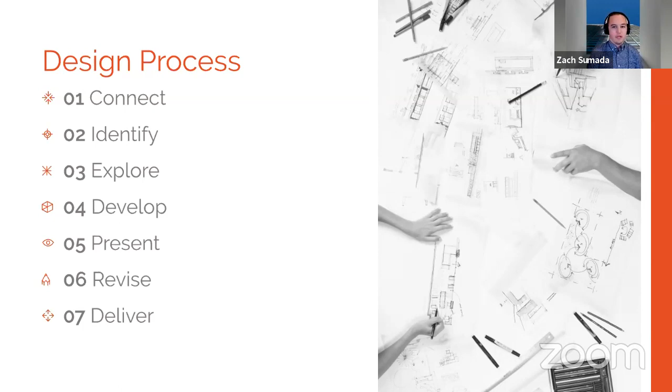And so we developed this process mainly to keep us on track and to help to communicate to the client, especially how they're going to be guided through this process. Because oftentimes the clients that you're meeting with have never met with an architect before, they've never built a building before, and the lingo and the process is kind of new to them. And so we're going to run through this today.

And our design process really starts with that connect phase. It's the first business development meeting. It's that first meeting with the client to discuss what their goals are for the project, what their business goals are, what their budget is, what it is that they're looking for. And oftentimes you're going to help them figure out exactly what that program is. It's very rare that a client will come to you with a sheet of paper that says, I need, for this example, we'll be using an office building, X number of conference rooms, X number of offices, and this many workstations.

We as architects oftentimes are helping them create that, understanding the requirements associated with exiting and understanding the exact layout. All those different things are what you're going to have to extract from them in order to build a successful project. In that first phase also, that's a really good time that you lay out some of that jurisdictional stuff. That's where you get those kind of prerequisites before you even put pen to paper. You get that all on the table so that everybody starts at the same point and understands the same challenges.

Yeah, because oftentimes when it comes to these jurisdictions, you don't want to propose a building that's 60 feet tall when the city requirements for that area or that piece of land won't allow that. And so that early phase of identifying and outlining the goals, outlining the program, setting up weekly schedules, scope of work, all that stuff happens very, very early on. And then from that point, you really start to dive into exactly what this building or buildings could be.

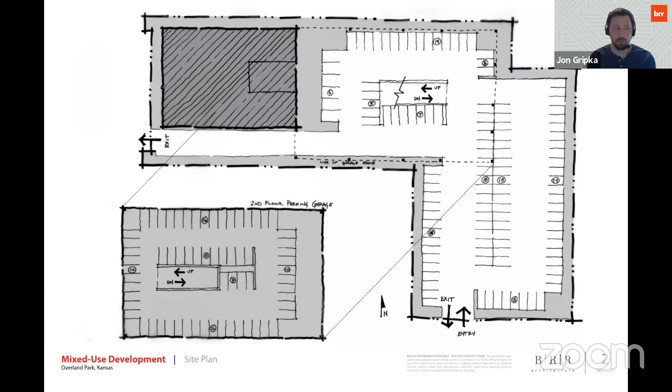It shows a basic idea of the floor plan. So it doesn't have to be just a very loose concept sketch at this point. You can start figuring some stuff out and doing so with pen and ink. And I really, really would encourage everybody, before they design anything, to just draw some stuff. Just get pen and paper, get loose with it, and really let your creative muscles expand there. It's definitely a worthwhile exercise before you get into any design, just to do pen and ink.

Yeah, I should have prefaced that at the beginning: you're going to see examples on your screen of a sketch, but this isn't just, hey, we came up with this and that was it. This was an iterative process similar to what you are all doing in studio right now, and you are constantly testing out different ideas because you never know what that next idea can lead to. But the whole concept is to be able to do this very quickly and very efficiently. Turning around site plan concepts like this would take an hour, not days. So you want to be iterative, and you want to make sure that you're thinking through as many scenarios as possible, but you also want to be mindful of everyone's time.

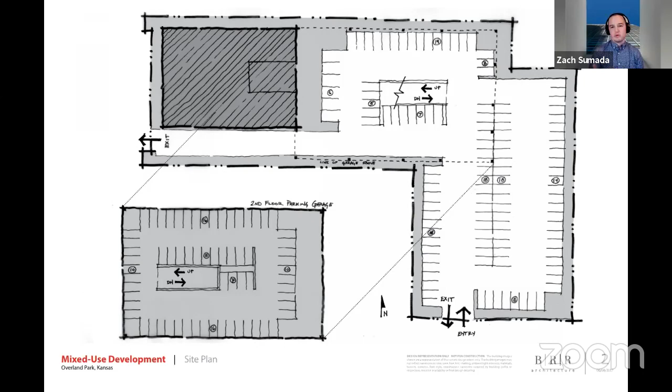And from there, it really begins. You get into the fun part of, okay, now we have the site, we have a building, we know approximately what the square footage or floor plan is going to look like, but how do we even begin to communicate to the client what this thing's going to look like? And that initial phase isn't just starting out and saying, this is a blank slate, this is what you're going to have. Oftentimes we meet with clients and we say, what is your idea? And they can give you words: I want a modern, or I want an industrial look. I want contemporary, I want traditional. But all those words mean different things to different people.

And so the process that we utilize at BRR is going through this process of precedent imagery. We put a bunch of projects in front of the client that are built, renderings, details, lighting, texture, they include everything, really to just get an idea for what it is that they're trying to achieve. The building in the upper right-hand corner of your screen, very modern. The middle one on the bottom, very traditional. I would say that three of these buildings are very modern buildings, but they all have very, very different design aesthetics.

So extracting that level of detail from the client early on, it's like, well, I really don't like metal panel. I'd like dark wood. I prefer this rich look to it. I've got to have brick on the building. All those different things help you when you start getting into the design phase, being able to jump back to this initial identify and connect meeting and say, hey, this is what our goal was. This is what we were trying to achieve. And let's make sure that we continue to implement those things.

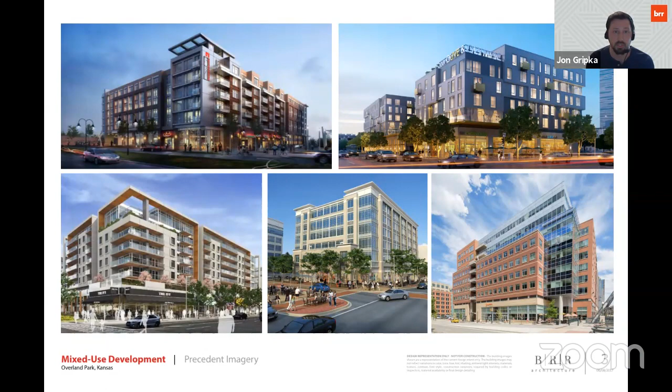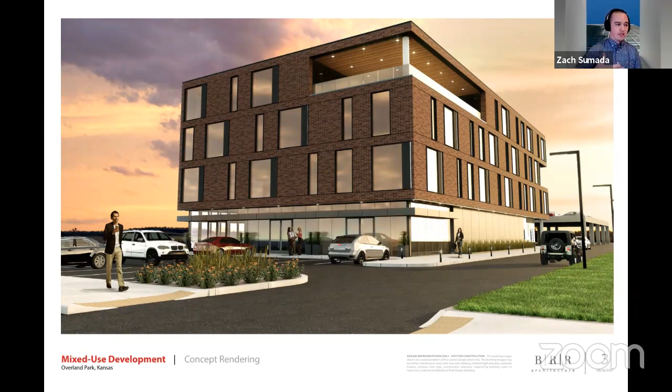And when we started this process, we did the exact same thing with our ownership group, as well as the developer that was helping to build the project. This initial concept you see on the screen was very, very different than what we ended up with. But this served as a jumping off point, because the developer can now approach other potential tenants and say, hey, this is the location we're looking for. They can approach banks and say, this is approximately how much this building is going to cost.

The contractor can look at this and say, this is what we're seeing on the screen. We're seeing butt jointed glass. We're seeing brick. We're seeing a fourth floor patio, randomized windows, full pane glass. This is going to cost X number of dollars. And having those pre-con services happen in this schematic design phase is possible because of the level of detail that you put into these models.

And as you guys are all aware, these things don't take very long to create anymore. And so incorporating that kind of stuff into the schematic design phase is vital for a project's success moving forward. And so what you see on your screen was an early iteration where we oriented our office building east-west, had a drive aisle that paralleled the building.

But what we found was that it minimized street frontage, which is a requirement of the city. It minimized the retail frontage, which the city wanted, and it really kind of pinched the parking. And so from this early phase, we were like, okay, well, we need to revisit this a little bit more and to get more square footage and to better understand the relationships of the site.

And it kind of takes us back there too, because part of the initial deliverables is that the developer just needed an image of something to generate that interest and to get that cost. And so that kind of takes us back to those first initial meetings where we would outline, okay, this is what we have to do first, just to see what we can do, see what we can afford, and then we need to revisit. And that takes us into our next phase, and that's the third, which is explore.

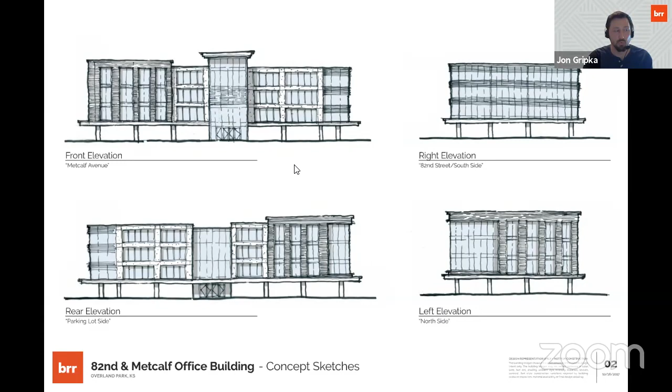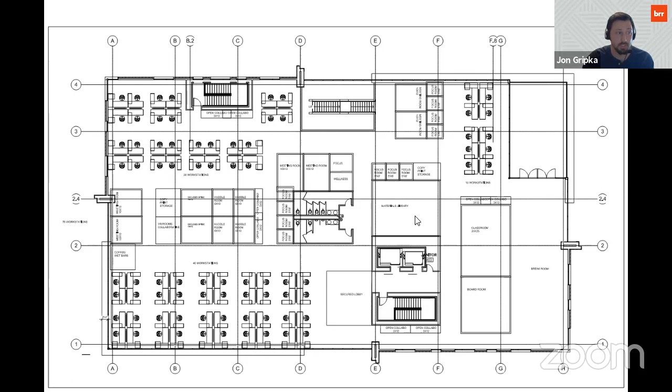Now in this situation, we were taking over 2 levels of this office building. So we did develop 2 levels in this plan, and this is pretty vastly different from what we ultimately ended up with, but it was our starting point. And so that's going to take us to our next step, and that's going to be develop.

And so what we needed to do now was to take all that information and all these different pieces from the city that we had to understand, and get that into a couple of different design options that we could then present to our developer and to our ownership, and to get their buy-off on a direction. So Zach, I'll go ahead and hand this back over to you, and you can explain our different options here.

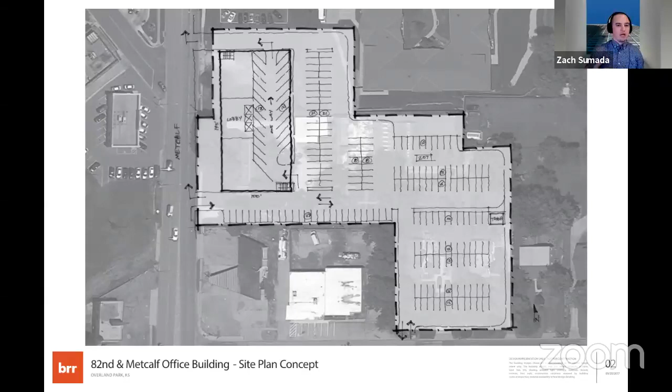Being quick with a pen and doing quick iterations is vital, because it allows you to very quickly understand what you can get away with or accomplish with a different layout. This was probably one of a multitude of options we looked at as a team to better understand what our goals were and where we wanted to end up. You'll notice the orientation of the building changed, the parking deck went away - all things that created a less expensive product that allowed us to spend money elsewhere.

In this phase, we start to extrude things up and begin to understand the massing of it - looking at the elevator cores, the stair towers, the potential for skylights, and carving and hollowing out this building to start creating a piece of architecture. This is all stuff you do in the schematic design phase.

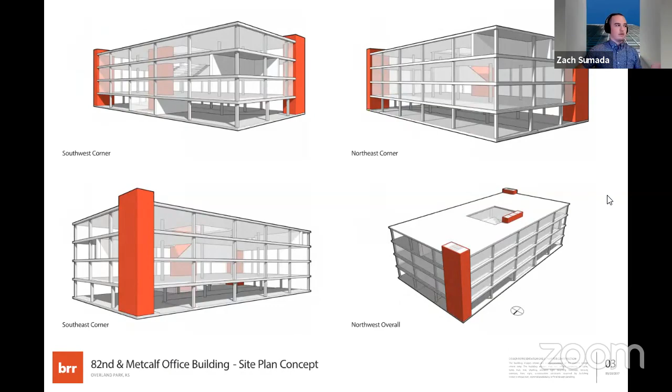Again, these are things we turn around in an hourly time block. This was one of a multitude of options for what happens if the stair towers are on the end, a central core with a skylight in it, with amphitheater style seating. What we ended up with was slightly different than this, but quick massing studies we've done here in Sketchup really help to communicate that design.

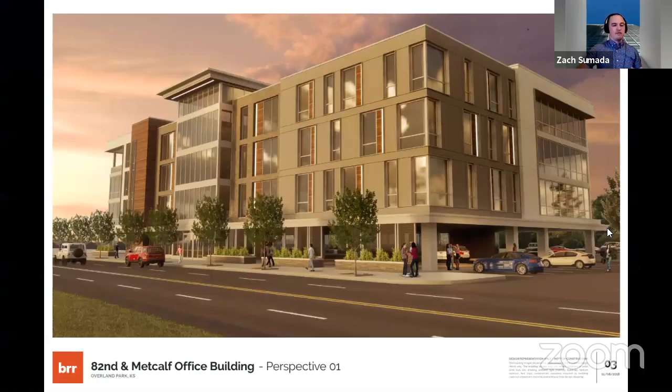Going into the present phase - the one thing I think as students we all kind of fear at the end. This happens multiple times, and you're going to have feedback from your ownership, developer, or contractor about the overall look and feel of the building, ways to save money, ways to be more efficient. This present phase for us was presenting to our ownership group two different concepts.

One concept had more of a traditional approach, which you see on screen here, which raised the entire building up on a podium to store parking underneath. Looking at the massing of it, starting to present to the city and start that communication of, okay, what do you see here, and what are some possible hangups?

Starting to apply some materials, some lighting, again giving it more context, building up that surrounding streetscape and making it a believable project - adding some scale and texture and realism. So that's the Metcalf side of the building.

Moving around to the northeast side, this is where we start to incorporate landscaping. Jurisdictions are very particular about that sort of thing - the amount of fenestration, the type of materials being used, screening parking lots from surrounding residences, screening rooftop units from surrounding residences. At this phase, because we're in a 3D model that's very accurate and geolocated, we can really start to understand what we can do.

That led us to our second iteration of this same project, looking at more of a modern approach with this bent frame structure you see off to the left, creating some efficiencies. This plan, you'll notice, is still elevated. We had a central core that had a lobby in it.

What we ended up developing was - we thought the entire ground level would be parking. Well, that didn't end up being the case, because we found through this process the ability to add some more usable square footage, which you'll see here in a bit. But again, these are quick models, all rendered out of Enscape for SketchUp.

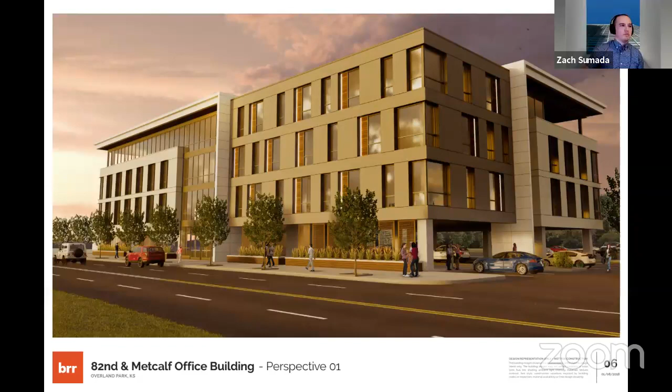Very little Photoshop work, except for maybe those birds up in the upper right hand corner. But a lot of this stuff is built into the SketchUp model, again to expedite this process, so you can spend more time doing the stuff we love doing as architects, which is the actual design process.

Something I want to point out too is just the scale we give to these renderings. This is something you as students can start to practice now - populate these things with plants and trees and cars. Zach kind of jokingly talks about the birds, but those birds provide some movement and activity to this rendering - that's a still shot. Do that sort of thing, and it's going to really enhance your renderings.

It does kind of enhance the way your renderings are going to be perceived. So that's something you just got to start doing now, and take that with you in the rest of your career. Show a building as it would be, which is a very active and lively building.

So our next phase, that's going to be revised. So ultimately, we presented the two options. Our ownership and our developer both liked the second option, the more contemporary option. So what we needed to do now was take their comments on those options and kind of move forward and work with them. So we kind of had this base form, and now we needed to see what could we do to kind of answer some of these curiosities that they had about the project.

And so one of the main issues is that we needed some more retail storefront. And so we went through and we added a little bit of glazing on the first level and kind of brought the scale of this down to the pedestrian level to give that more of a presence there. That was part of it. You'll notice that the materials have started to change. We've really started to look into that material change just to see the effect on the building.

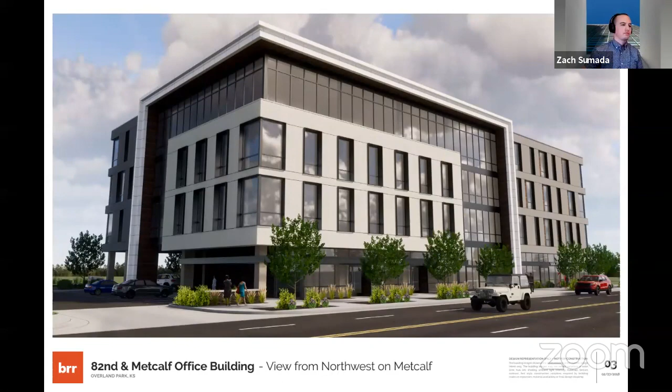But maintaining a well-built SketchUp model like this that has that level of detail in it just adds that level of realism and believability to it. Again, at this stage, which is very, very early on in the design process, before anything's even been dug out of the ground, figuring those things out now and having a rough number for what it's going to cost your client is crucial.

Yeah, so at this point, we're going to go ahead and pop over to our SketchUp model here, and Zach can show you a little bit of that work that we're doing in there, just how we can kind of quickly do these different options.

And if you want to stop sharing, go ahead. We're discovering the magic of Zoom.

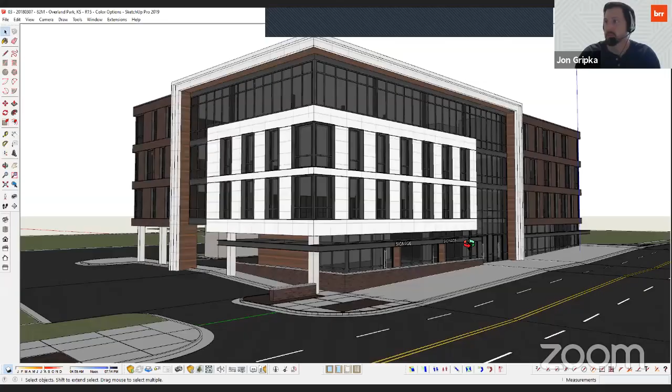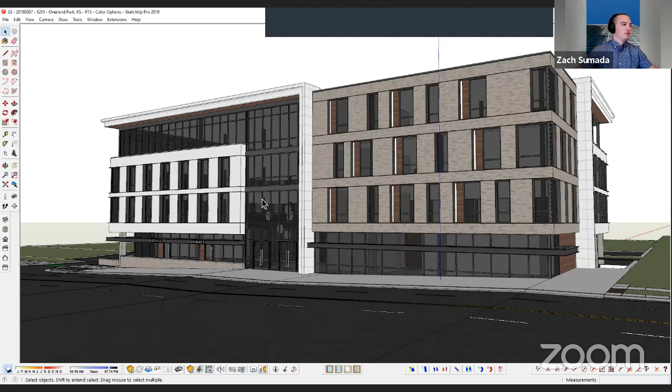There you go. So this is the SketchUp model that we are talking about, and as you can see, everything's built up pretty much all the way around the site. For this color option, we had stopped the site short just to maintain a clean model for looking at these different color options. But what you see on your screen is basically where our building ended up. But what you don't see is layered into this model were multiple iterations of the same model, looking at different color options.

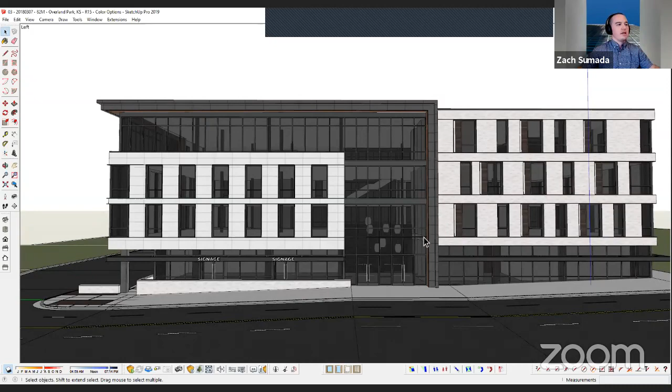We really liked the way that the forms were stacking up in this concept, but we wanted to explore the different material options for our ownership group, whether it's using a light beige brick and more of a fiber cement panel here in the middle, or do we go a completely different route: white brick, a dark bent frame metal panel that wraps the glazing, and then leaving that white metal panel box floating in the middle. And what we started to realize is that you start to lose some of that detail and that frame and what it does for the overall architecture.

And so looking at another option with, okay, well, what if that panel goes to dark and that bent frame goes light? All these different things are stuff that we explore very early on. We like the form, we like the proportions, but are we sure about all these materials and what they're trying to achieve? And what we decided on as a group throughout this phase is that, in order for this metal panel box here to really feel like it's floating in that glazing, it really needed to be a light color.

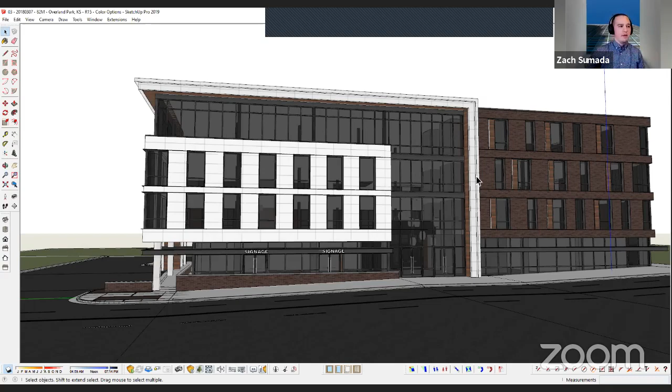And so we went back to our initial concept, which was this white metal panel box framed by the glazing, because as you guys are aware, during the daytime, the glass really does appear to be black. And so doing a dark metal panel box against this dark glazing really just tended to muddy things up. But then we really wanted that frame to pop. And so we went back to that white metal panel, introduced some wood, some linear lights to help with adding some warmth and a different texture.

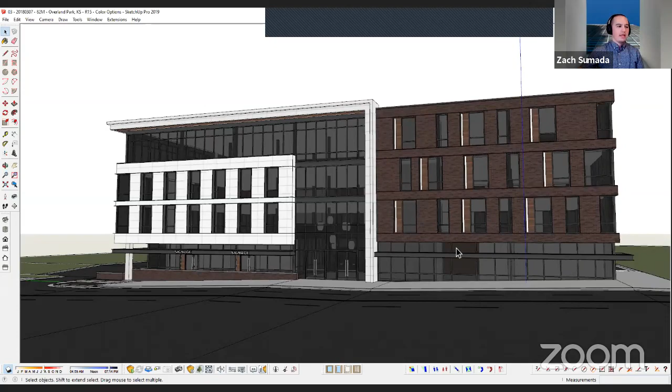And then switched, you remember in that rendering, we had this whole box as stucco. Well, the city requires a certain amount of masonry. So we looked at floating this brick box above the first floor retail space that we ended up adding. You'll notice that entire ground floor gets modeled up now to show the knee wall and how you circulate around, making sure you have ADA access all the way around the site.

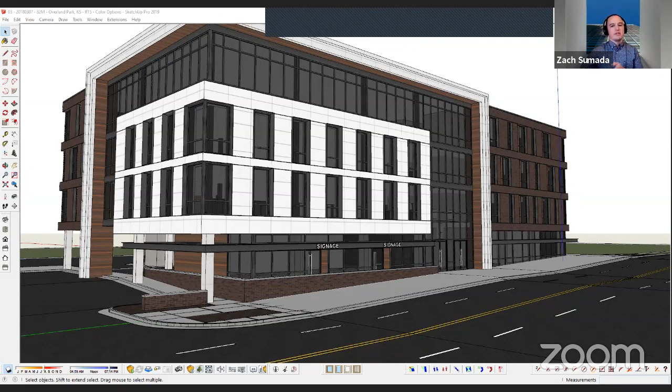And all these different things, it's iteration after iteration after iteration. I think at this point we were to revision 15 on this initial scheme. But these things are happening over days and weeks and not months. But having a model like this has been vital to helping this project become a reality. And it's something that we use for all of our projects across the board.

Yeah, it's really key, that timeline too, because we're not going in with finished renderings of 6 different projects. We are going in with a model and basically, in a matter of minutes, sitting with our client, our owners, and saying, all right, what should we do here? Should we make this brighter? Should we make this darker? And coming up with a design that everybody was happy with at the end of the day. And we were able to do that in a really, really efficient amount of time.

So this all leads us up after several different iterations, and after all the schematic work, what we ultimately have is our final phase, and that is deliver. And ultimately what you're going to have to do is come up with a deliverable that your client needs to get this project built. In this case, our deliverable was coming up with what's called a city submittal package, and that's a set of site plans, elevations, renderings that the city can then look at and give their 2 cents on and either approve or reject.

And so this isn't something that we just take in and say, here you go, this is what we designed. We were in conversations with the city for months, actually in this case years before we did this project, so that we could keep them in the loop on what we were doing. And so ultimately what we did was we developed this set of drawings, and I'm going to clip this down. There was a bit more that went into it, but I'll show you the relevant design drawings here.

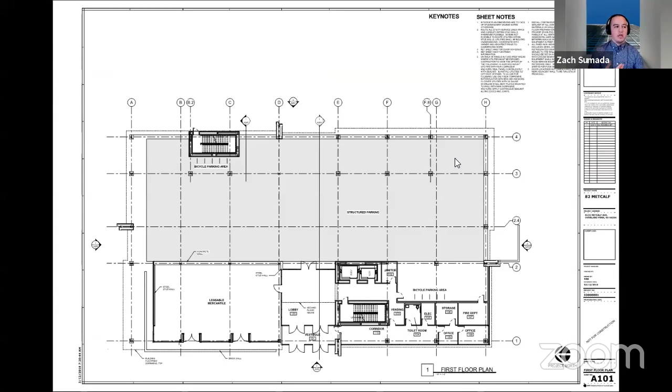And it led to conversations with the city about adding in crosswalks to Metcalf, creating HAWK lights that allow our pedestrians or our employees to get over to adjacent properties that have amenities that we wanted to visit. So all these different things are happening very early on with the city before, again, anything construction related actually starts.

Okay, looks like we're back now.

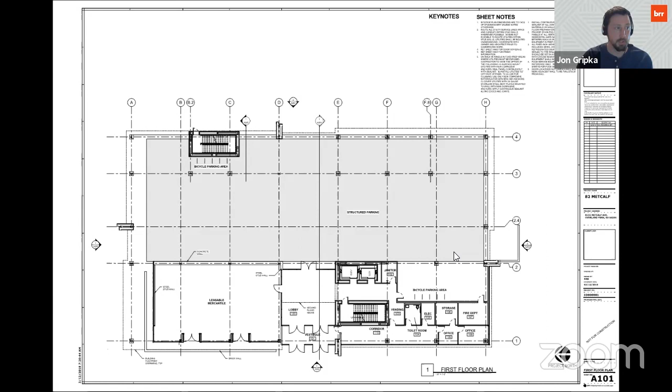So as I mentioned, we've got this full detailed site plan that shows all of that information that the city is going to need to make sure that the building works functionally on the site. We showed just the first floor plan here, though we did submit a full set of floor plans for the city to review. In this case, we also did fully rendered elevations with material callouts. We didn't get too specific with the material callouts in this instance because we didn't need to.

They're fairly general, but it is enough for them to do their calculations and see the forms of the building and understand those. And then lastly, we took the initiative to do a set of renderings to show what this would feel like on the site. As I mentioned before, they're very activated renderings with vegetation and cars and all the surrounding context. And we showed all different elevations of the building.

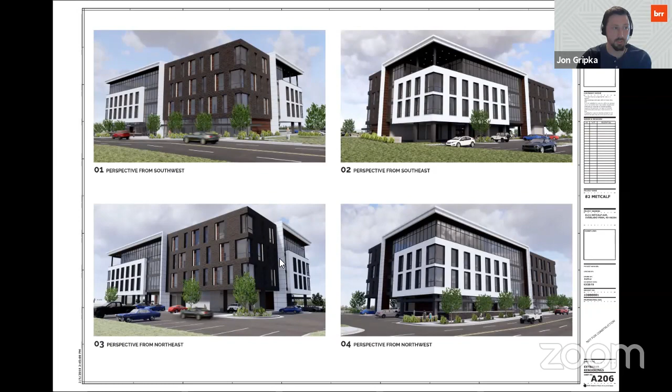We also took the liberty of showing dusk renderings to show what this building would look like at night, because that's something as young designers you have to consider: a building is not going to be in daylight half the time. You need to design a building that's attractive both during the day and at night.

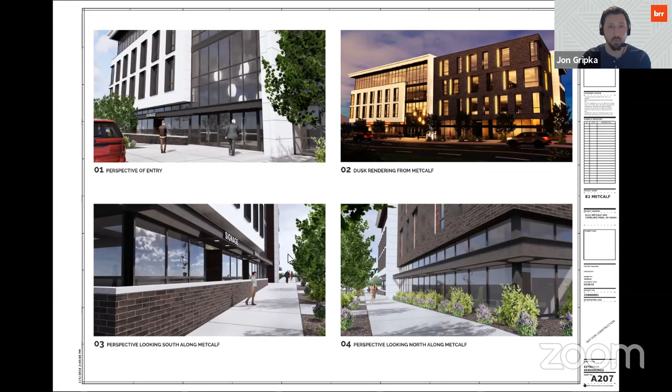We showed some of those perspectives from that approach, so you see where it's at at the pedestrian level. And we also showed the perspective from the patio, which is a powerful one for us, and what that view would look like. And so we handed that into the city. Obviously, it was approved, because we have now moved into the completed building.

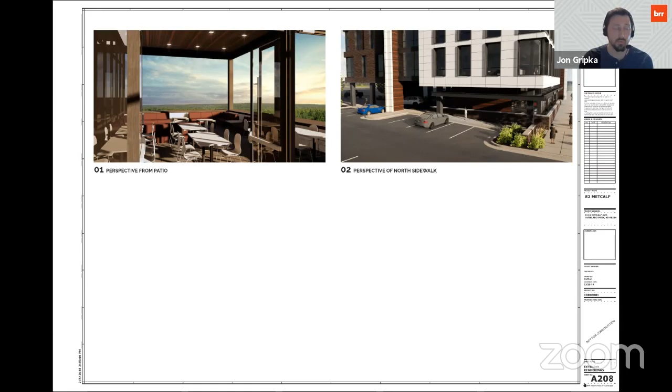And so it's a process that this one went, how long, Zach? About 2 years from start to finish? Just over 3, yeah. So to get this thing designed, get all that information, implement it, get it approved by the city and get it built was a 3-year process. And it all started with that initial meeting where we understood what we were doing, and we attacked this in a very systematic way that still allowed for creativity but kept us on point and hit those milestones so we could keep this moving forward in a way all entities were happy with.